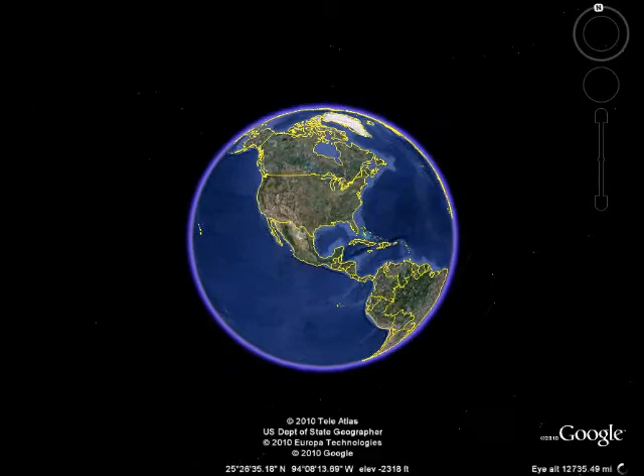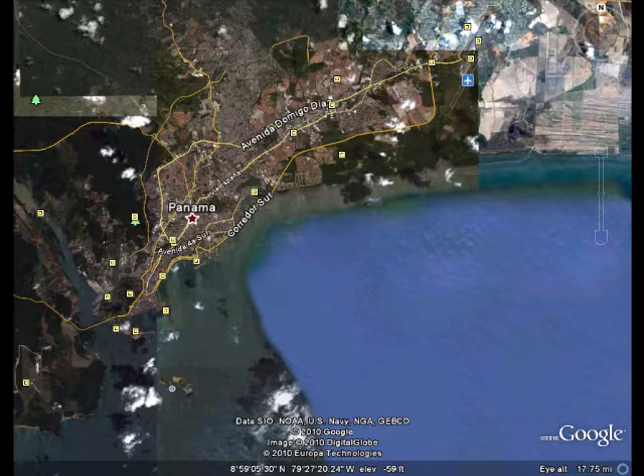La República de Panamá, or Panama, lies in the heart of Latin America. It is widely known for the canal built between 1904 and 1914, which passes through the country and divides the American continent. Panama has a fast-growing economy and a large per capita consumer base in Central America.

Business and investment is very strong. Because of this, it has seen a major increase in its economy and job growth. As a result, a major problem has developed in its daily traffic on its roadways.

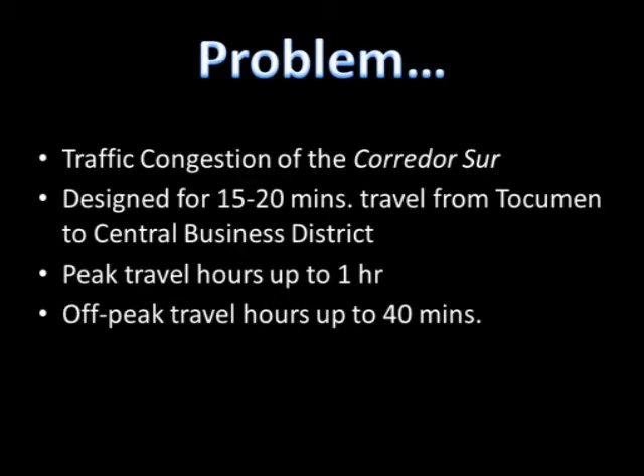The problem in Panama City lies on the Corredor Sur, a major highway that goes through the city which many residents use on a daily basis to get to and from work. Originally, it was designed for a travel time of around 15 to 20 minutes from the Tocumen region to the Central Business District. Currently, the peak travel time can be around an hour, while off-peak travel time can be up to 40 minutes.

This resident, commuting to work, complains about the rise in toll, the loss of productivity, the money and gasoline spent, as well as the long time it takes him to get to his destination.

The solution is a public mass transit system that will utilize the adjacent water surface of the Pacific Ocean to create a transit network that is fast, efficient, and that will alleviate traffic on the Corredor Sur.

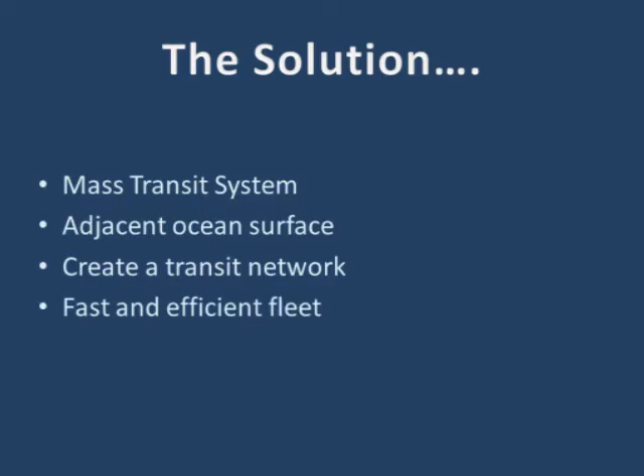The first thing we had to do was determine the amount of people that will use the ferry system. The method used to determine travel demand was by analyzing the traffic flow of the Corredor Sur. We found traffic data from 2002 to 2004. This data studied the traffic flow by vehicle category, cars per head, origins and destinations, trip purpose, and trip frequencies. In this study, information of the traffic flow was forecasted until the year 2029.

After going over the study, we decided that we wanted to decrease the traffic flow of the Corredor Sur by 40%. So after gathering the information needed, we were able to determine the number of people that would use the ferry for their journey. We estimated that about 727 riders in Tocumen, 1,399 in San Francisco, and 392 in San Felipe will use the ferry transportation system.

Determining the vessel type to be used was the next step. To do this, we researched different types of vessels that are available. Examples of vessels that may be used to transport people are monohull, catamarans, hydrofoils, and hovercraft. Each has its own pros and cons.

For monohull, they have low capital cost and are low maintenance, but the draft is high for shallow waters. Catamarans have a more stable platform than the monohull and are also greater in maneuverability. But these boats' capital costs are higher, and at low speeds the fuel consumption increases, which makes it costly.

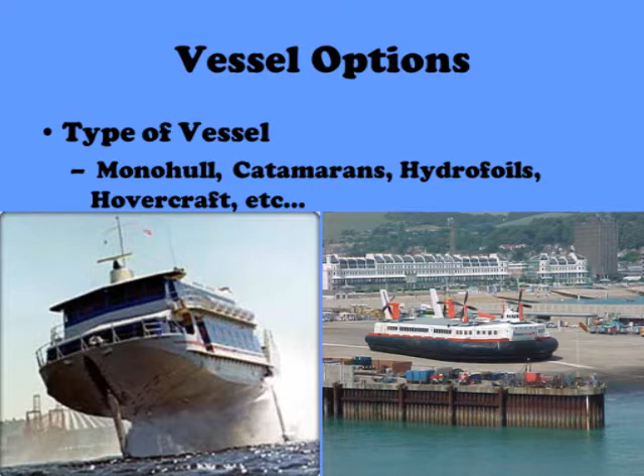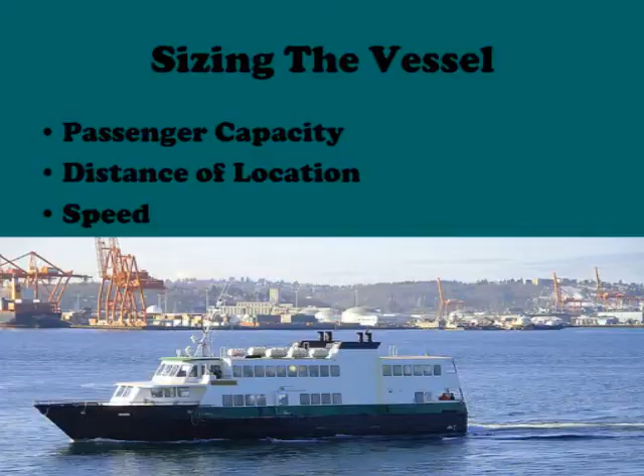After we determined the number of people that may use the ferry, our next step was sizing our vessel based on the passenger capacity. We also took into consideration the distance between our 3 docks and of course the speed of the boat. Based on these 3 criteria, we worked out our options and decided to use a passenger boat with a capacity of 250 passengers and a speed of 25 knots.

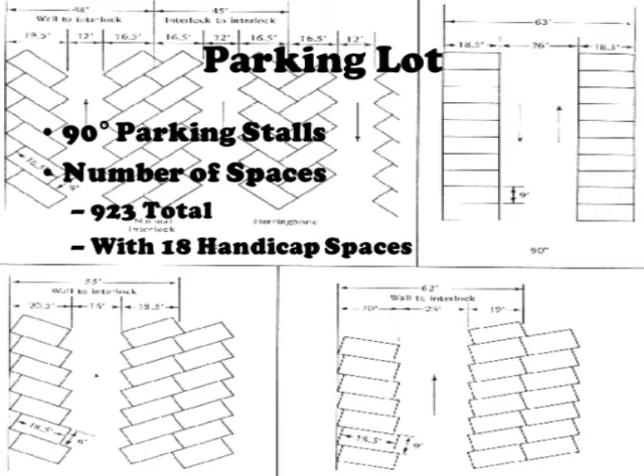For the parking lot, we have designed spaces for 923 vehicles total. This also includes 18 handicap spaces. We decided to have 90-degree parking stalls so that it can accommodate more cars. This parking lot is designed on the causeway to make it easily accessible for commuters to use the ferry.

We have selected routes to and from each location: one route between Tocumen and San Francisco, another between San Francisco and San Felipe, and a third between Tocumen and San Felipe.

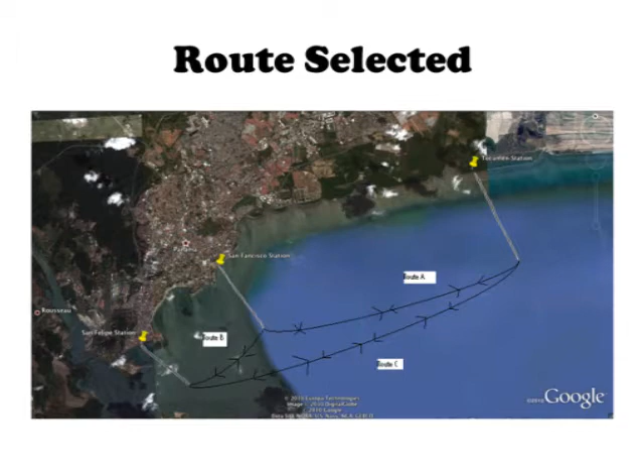The geotechnical aspects being presented for this report are two alternatives to make the water transportation system operation possible, and the design of adequate foundations for the pier structures.

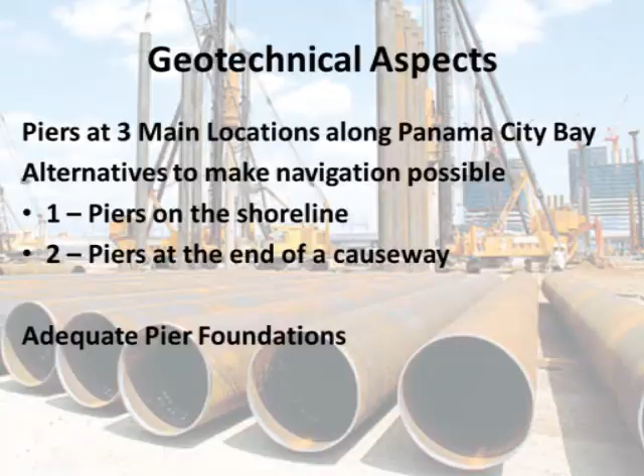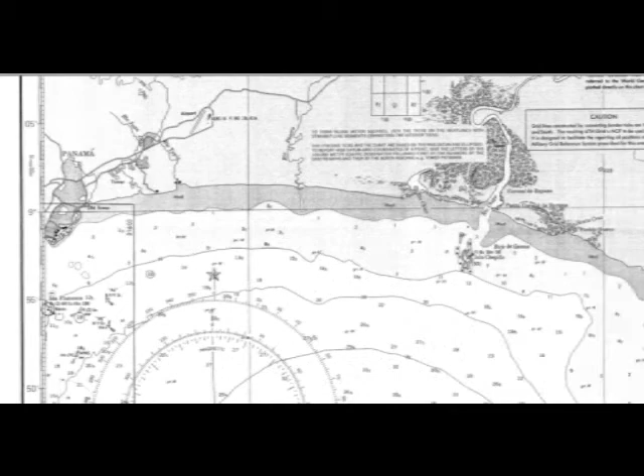Alternative 1 consists of building piers on the shoreline. After careful analysis of nautical charts produced by the National Oceanic and Atmospheric Administration, it was determined that the existing conditions do not allow for the operation of water vessels due to shallow depths that extend all along the bay. The solution is to dredge navigation channels that can accommodate two-way vessel traffic, as well as account for the draft

of vessels proposed for this project. This means that the channels will have a depth of 5 meters. One way to provide these navigation channels would be to dredge along the length of the bay. It is estimated that close to 4 million cubic meters of material would need to be removed.

A second way to provide navigation channels is to dredge paths that are perpendicular to each of the 3 pier sites. The channels would extend into the ocean until the desired depth of 5 meters is reached. It is estimated that over 2.5 million cubic meters of material would need to be removed.

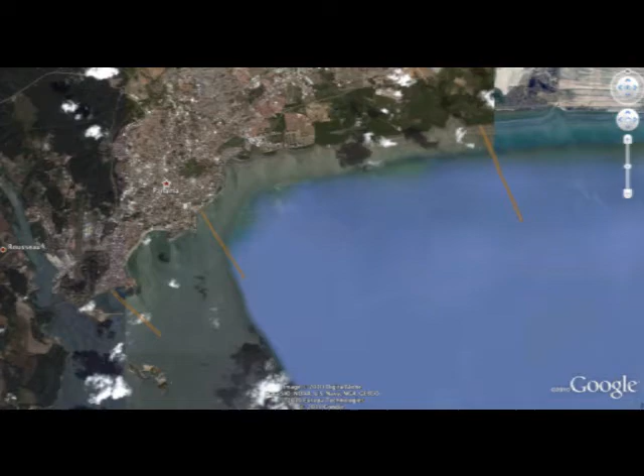A third way to provide navigable conditions is to dredge the entire area in front of the bay until a uniform depth of 5 meters is created. If the previously mentioned dredging volume sounded very large, the material to be removed for this option is sure to sound excessive. In addition, all navigation channels need maintenance due to movement of currents.

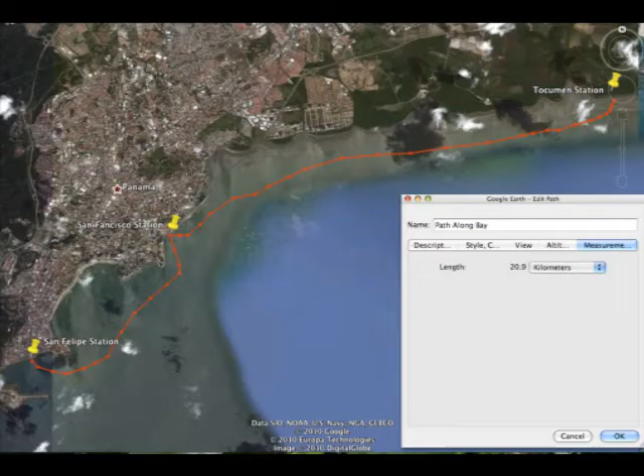Alternative 2 consists of building the piers at the end of causeways that would extend from the shoreline of the 3 locations to a distance into the ocean where the desired depth of 5 meters is reached. A causeway is a raised road or path structure that runs across a body of water. This structure would provide the needed navigation conditions that most water vessels need without the excessive dredging and its maintenance.

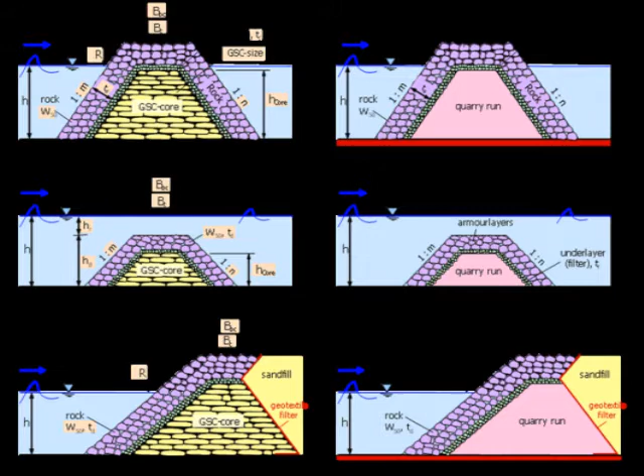Causeways are built from several compositions that include large rock sizes on the outside for structure protection and varying soil layers inside the structure, which are designed with proper filter criteria to avoid the particle migration produced by the currents. Geotextiles are also popular and serve the same purpose.

Due to the strength of large rocks and their abundance coming from the Panama Canal expansion, specifically from the Gaillard Cut area, a causeway composed of only large rocks is recommended.

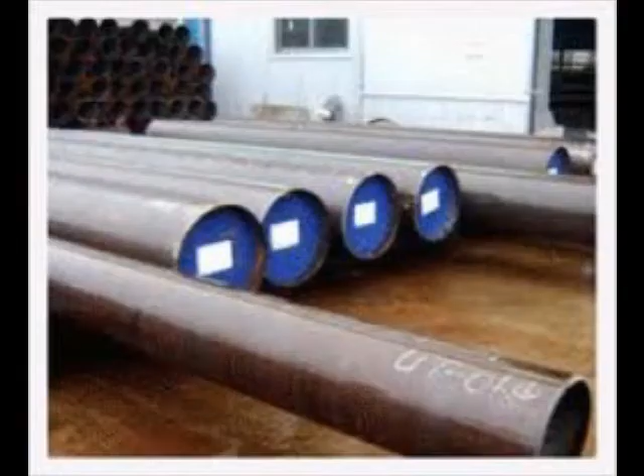The pier structures would be resting on 10 closed-ended steel pipe piles measuring 0.61 meters in diameter and 40 meters in length. The piles would be driven 28.6 meters into a soil profile that includes sensitive clays, silty sands, sandy silts, and silty clays. The remaining 11.4 meters is the distance from the ocean bed to the concrete girder as specified by the structural engineer.

After comparing different pile materials and construction methods, it was determined that the driven closed-ended steel pipe piles are the foundation of choice due to their wide availability, practicality in transportation to the construction site, and high compressive, tensile, and flexural strength. This foundation design provides a factor of safety of at least 2.5.

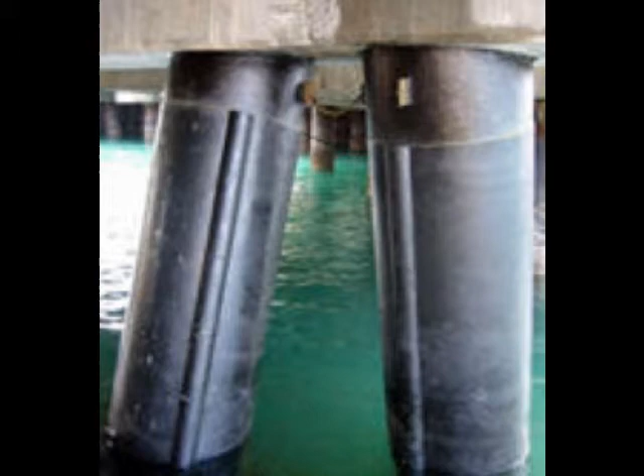Corrosion protection would be implemented by encircling the piles with polyvinyl chloride wraps that provide a tight-fitting, smooth, wrinkle-free encasement that creates a hermetic seal around the piles.

In the design process, all available specific literature, including International Building Code, ASCE 7, and designer guides and handbooks, were extensively utilized. Various materials were used for this project.

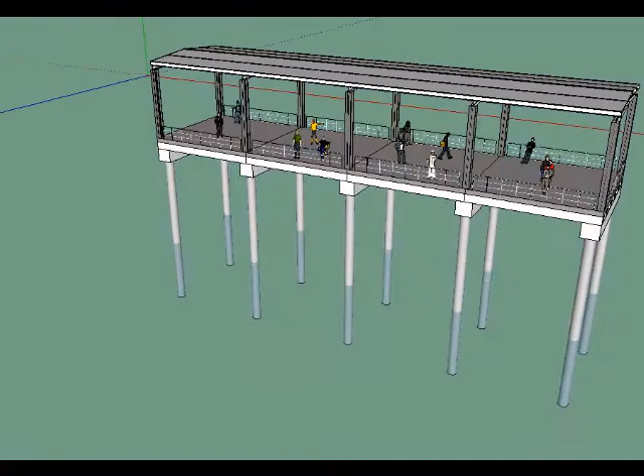5000 psi concrete and 60 ksi epoxy-coated rebar were utilized to better withstand severe marine environments. Structural steel has a yield strength of 50 ksi. The structure was designed to withstand dead and live loads, wind load, earthquake load, in addition to current load.

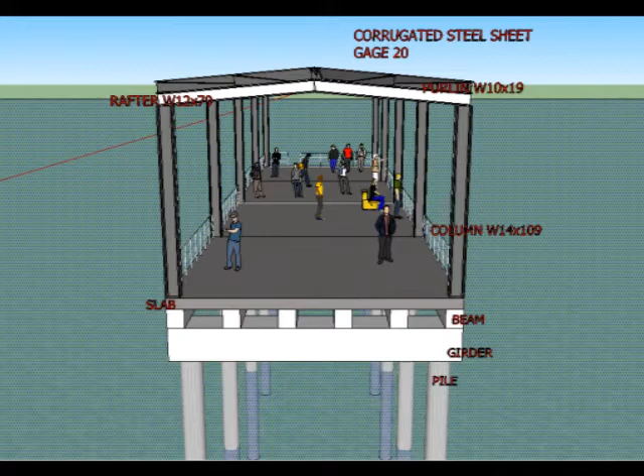The pier's gravity load supporting system consists of piles, reinforced concrete girders, beams which rest on the girders, and slab. The roof structure is made out of structural steel W sections and covered with corrugated metal sheet. Railing consists of aluminum pipes bended and connected together to create a dependable barrier.

Floating dock and gangway were utilized in order to board and unload passengers from the boat. It is due to high tidal variation.

For the accurate analysis of the pier structure, a SAP2000 model was created. This model accurately represents the real structure, including the correct sections and properties for steel beams and columns, concrete girders, beams and slabs.

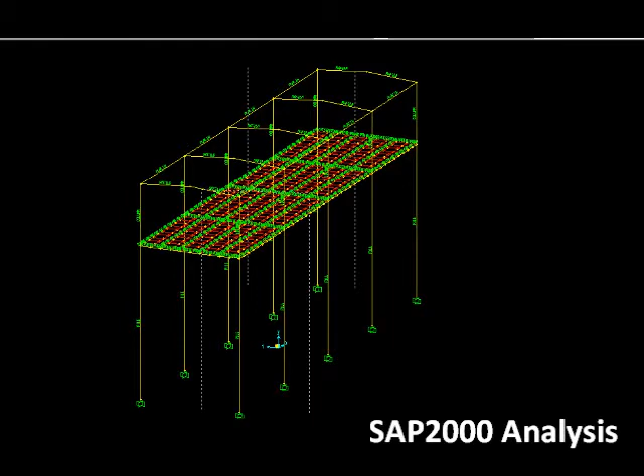SAP2000 computer analysis provides all the moment and shear forces, in addition to the deflections that act on the structure, done for the load values and combinations provided by the designer. SAP analysis is very accurate, fast and comprehensive, which is vital for the designer.

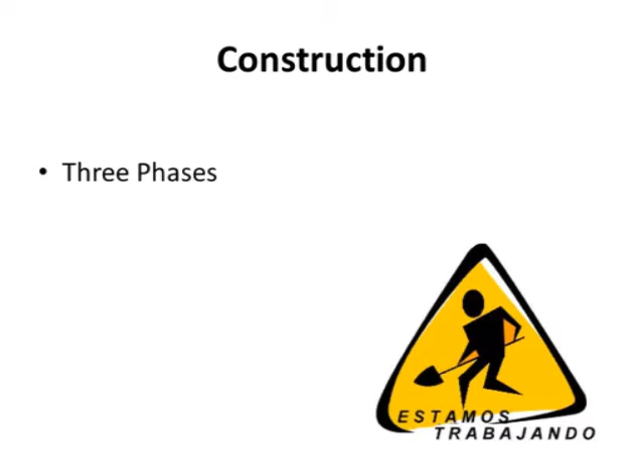Construction of our design will consist of three main phases: creating the artificial causeway, paving the road and parking lot, and finally building the concrete pier.

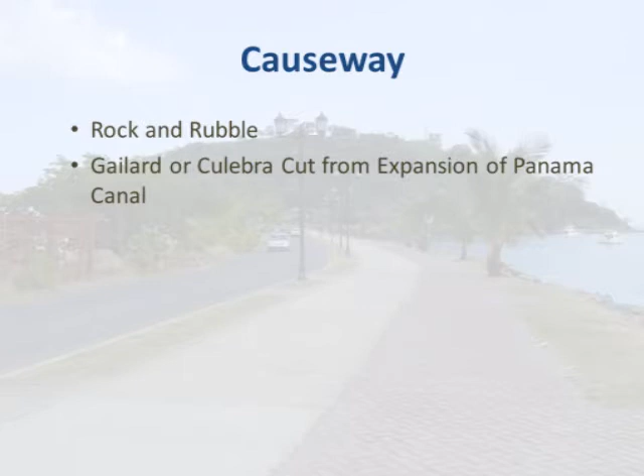For the causeway, the rock will be taken from the Culebra Cut section of the Panama Canal, also known as the Gaillard section. Due to the high volume of material needed, approximately 369,000 cubic meters, it will have to be transported by barge.

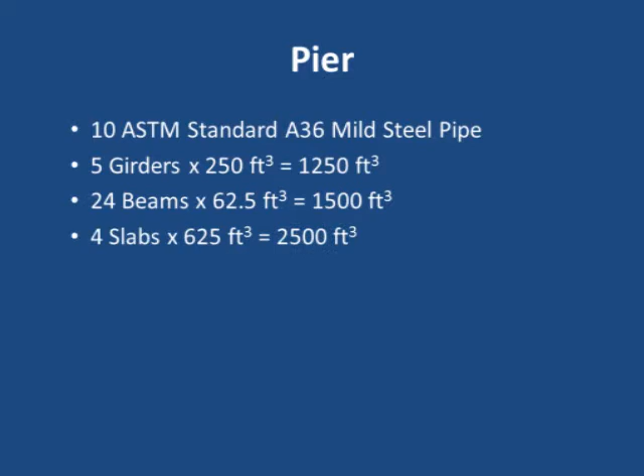The pier's main components consist of ASTM standard A36 mild steel piping used for the piles. It also consists of 5 girders, each with an approximate volume of 250 cubic feet, 24 beams, each with an approximate volume of 62.5 cubic feet, and a concrete slab divided into 4 sections, each consisting of approximately 625 cubic feet. The total approximate volume of concrete is 5,250 cubic feet.

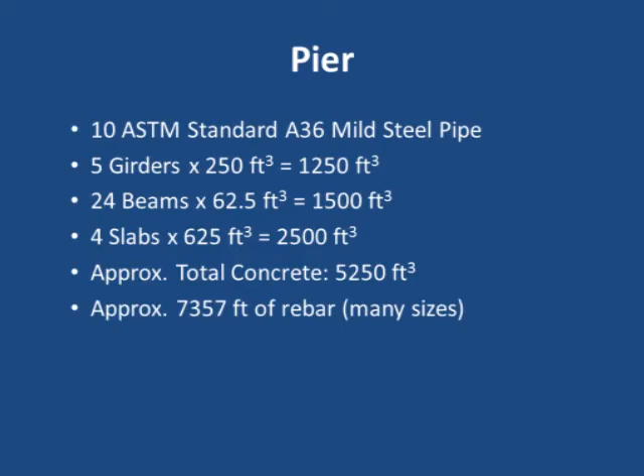There are numerous benefits which the new water public transportation system has to offer. I would like to name the main ones.

First, enhanced personal opportunities for the users. Second, improvement of the traffic situation in the city of Panama. Third, saving time for the system's users. Fourth, minimization of wasted fuel in traffic. Fifth, preservation of people's health. Sixth, generation of new employment. Seventh, gasoline consumption reduction.

The main social objection that our project can face is that some community members will question the fact that public money is being spent on a water transportation system rather than on a new road, highway, or dedicated bus route. There is a way to address this issue: a massive public awareness program must be implemented explaining the benefits, capabilities and costs of the new system.

The main cultural objection to our project is the cult of the automobile. Some residents of Panama City follow this cultural phenomenon and believe that an automobile is more than just a transportation machine. For them, it is a source of personal freedom, a social status symbol, and a way to get to all the pleasure sources that a contemporary city has to offer.

The best way to address this issue is an appeal to the preservation of the environment and architectural face of the city, as well as the faultiness of the car cult.